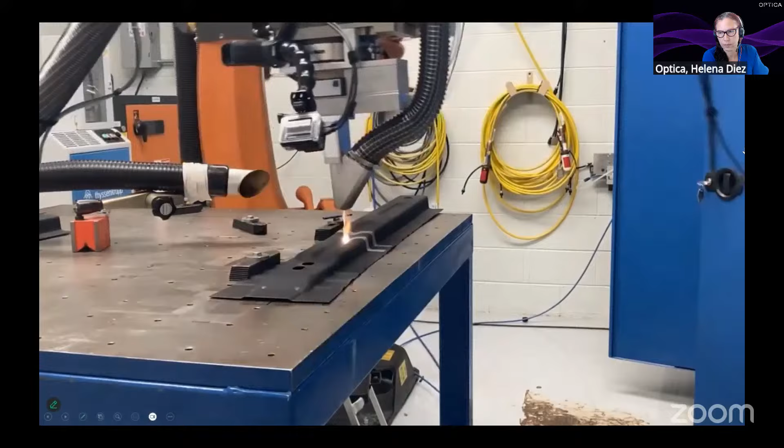Coming up, the Optica online industry meeting on laser cutting and drilling technologies. This 90-minute meeting takes place on Tuesday, November 4th at 10 a.m. Eastern, 3 p.m. in the UK and Ireland, and 4 p.m. Central European Winter Time.

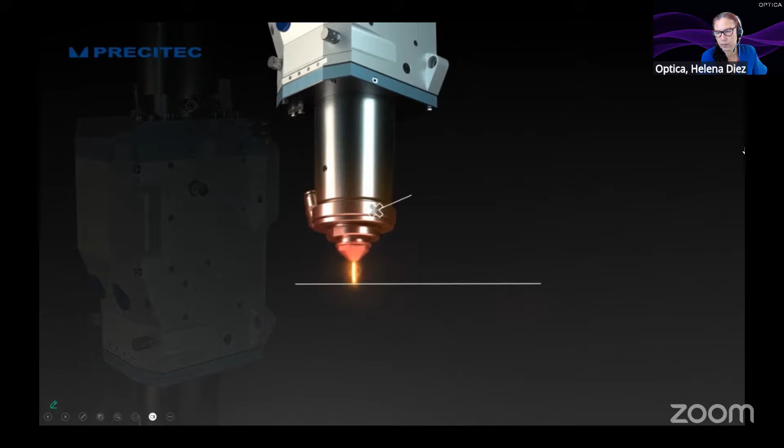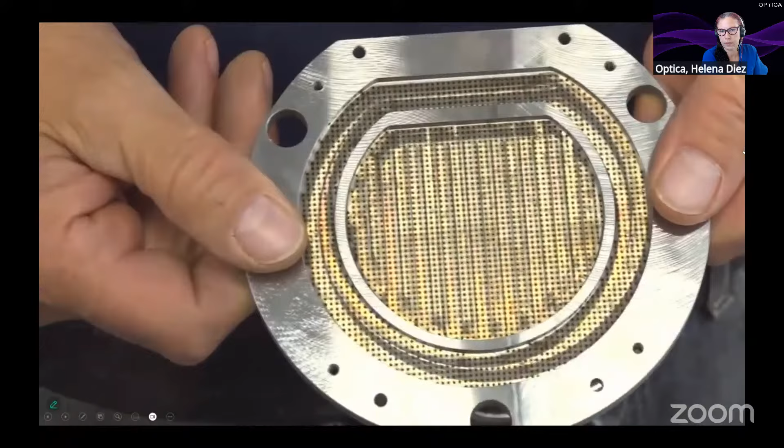This session explores the latest advancements in laser cutting and drilling technologies, two areas transforming industrial manufacturing in aerospace, automotive, electronics and medical devices. Laser cutting uses a focused beam to melt or vaporize material along a precise path, while laser drilling creates micro-scale openings in metals, composites and polymers. Together, they drive efficiency, precision and sustainability across production lines worldwide.

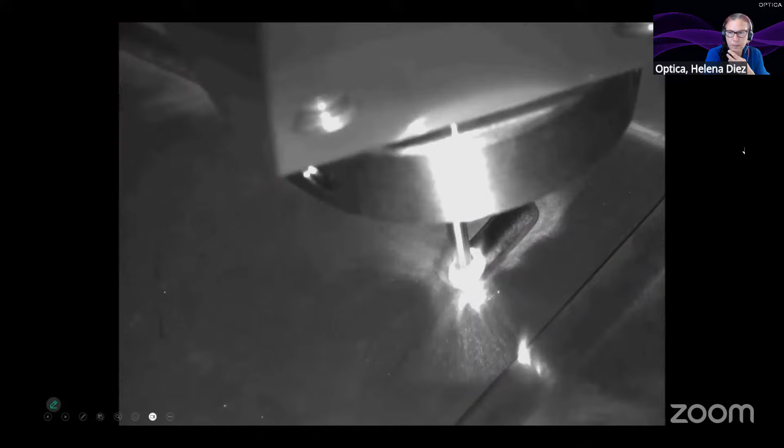We'll have featured speakers from Corning, Precitec and Trumpf. We expect to hear about metal additive manufacturing, making it possible to produce intricate geometries that traditional methods can't achieve. And representing technology enablers, we welcome active Optica corporate members, Raven, Aconier.

So, Aconier is doing laser machines?

And who can forget the demos in Munich from Fluence Technology. You can knock it, bang it, but the pulses, they are constant, they are stable.

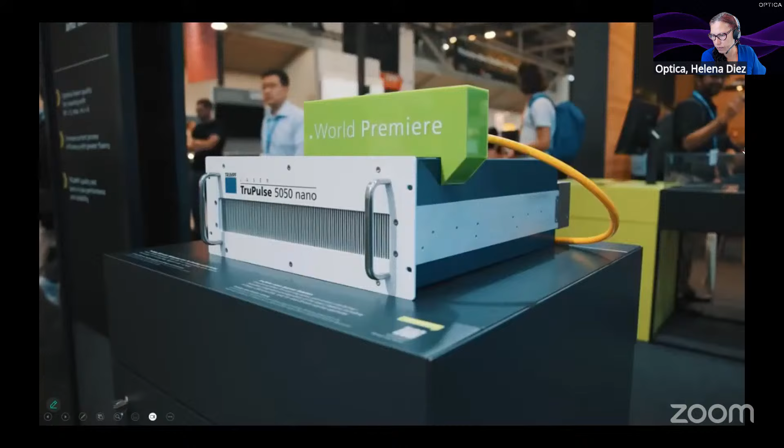Let's begin the live discussion. Hello everyone, welcome. The time has finally arrived. We worked very hard to make sure we had the who's who on laser cutting and drilling in the room. Welcome to the Optica online industry meeting on laser cutting and drilling.

And I see very famous friendly faces here. Thank you very much, Christoph from Iradion. Thank you, Celia from Raven. Thank you very much, Ilya from Fluence. Let's have a fantastic 90 minutes.

Allow me to remind everyone what we want to do here. In the next 90 minutes, with the support of ANSYS, we have two teams of companies. On one hand, we have integrators. As you saw in the opening video, Corning, Precitec, and Trumpf are here in the room to share with us their shopping list and what we can do for them.

On the other hand, we have the 2.1 micrometer lasers from Raven, we have the tools and the systems of Aconier, we have the ultra-fast femtosecond laser from Fluence, we have the company Iradion also offering their technology, the laser technology. The idea here is to make a match, not with those companies only, but also with everyone in the room.

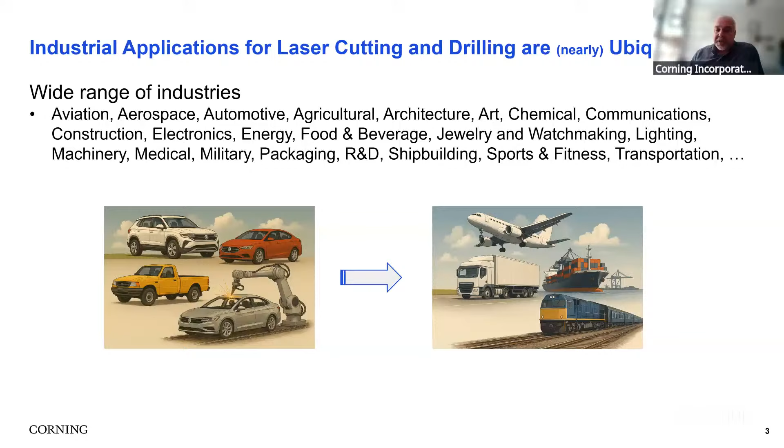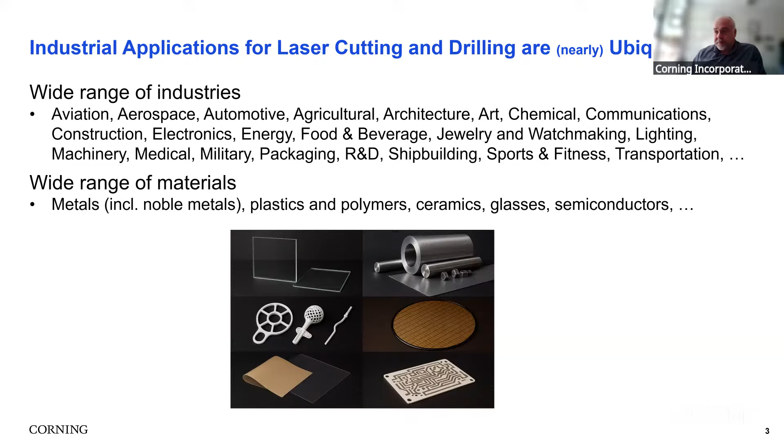Lasers are used to drill and cut virtually any kind of solid material. They're used in cases where you need very high precision, or where you need very low loss of materials, or very difficult materials to cut. So they have very powerful advantages: high material utilization, very high precision like I said. They also have very large process windows, so they're very stable, and they're very scalable for filling out, say, a large warehouse full of equipment. I'm sorry this picture's a little bit dystopian with the laser robots, but really, if you've got a large warehouse full of automation, you want lasers to be involved.

There are very strong trends in the industry favoring the large adoption of lasers, including miniaturization, which is pushing very high precision, automation, which is pushing scalability, low cost, and things like the integration of Industry 4.0. We're developing the next generation of materials, composite materials. We're using a lot of glass, very Corning here, so we've got thin, brittle materials, things with coatings.

And we also have rapid progress in laser technologies themselves. So you've got the sort of dollar-per-watt trend decreasing - things are much more affordable now. You've got size and form factor of lasers reducing, and you've got new wavelengths, things like burst modes, enabling lots of other additional laser technologies. If you want a little peek into this, there's a plug here for a December 2022 Optica blog post: how lasers are transforming the economics of industrial production.

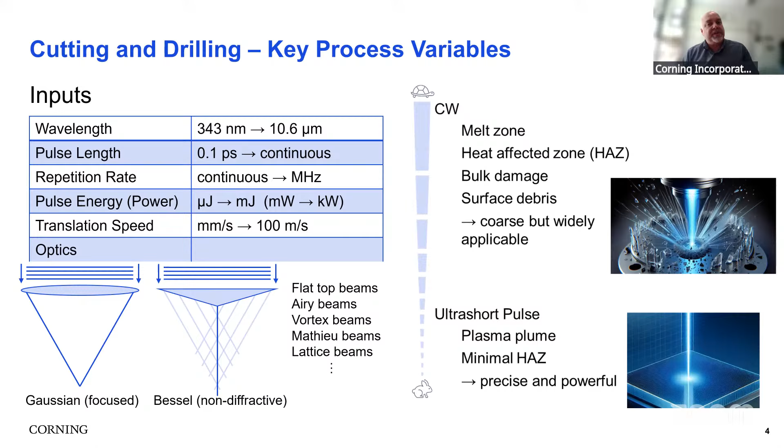Or you can go the other range and with ultra short pulses, start ripping electrons off of materials and creating very precise plasma plumes. This is a minimal heat affected zone, can be very precise and very powerful.

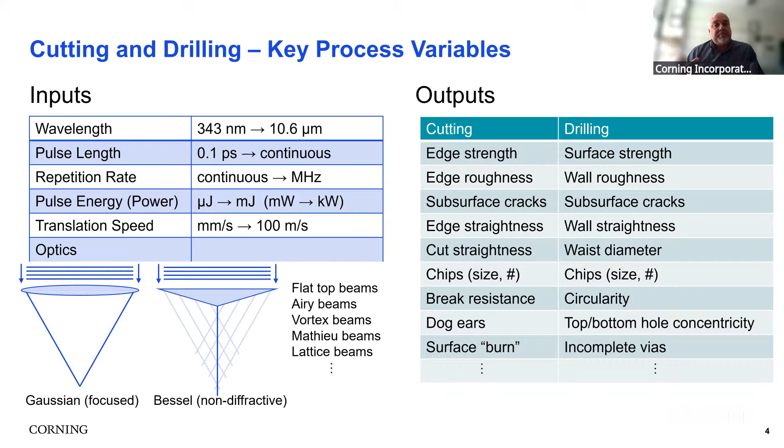In terms of outputs, you've got lots of quality metrics here about strength, edge strength if you're cutting, straightness, number of chips if you're using a brittle material, break resistance if you're separating materials. On the drilling side, you've got surface strength, you've got wall roughness. If you're making holes, you're looking at maybe circularity or the concentricity of a top hole and a bottom hole. If you're making vias, maybe you've got incomplete vias. So it's a very wide range of quality metrics.

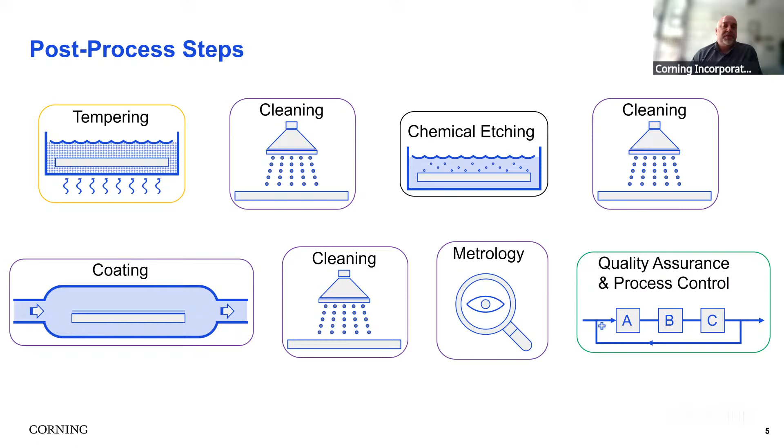Don't forget, you've got post-process steps. You need to potentially temper the material once it's been cut. You've got chemical etching or coating, certainly several cleaning steps as you remove either debris or accumulated environmental contamination. There's a metrology step very often that feeds into the quality control. And then you've got QA and process control where you feed everything back and improve your process. And this is in addition to packing and shipping and all the other processes as well.

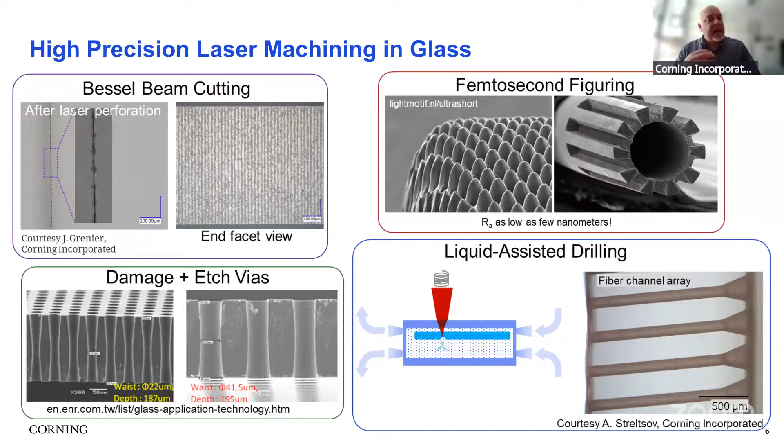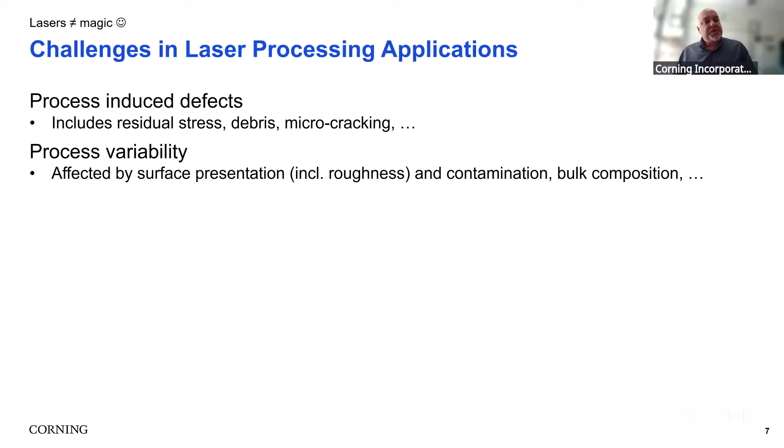All right, still, lasers are not magic. So there are still some challenges in laser processing applications. One is process-induced defects. This can include things like residual stress or debris. You've got some process variability. So lasers can be sensitive to roughness or waviness on the surface, contamination, potentially bulk composition, uniformity. The challenge certainly is to scale laser-based processes to dense arrays, trying to make very small textures across very large glass, for instance. That can be a challenge in terms of time and cost.

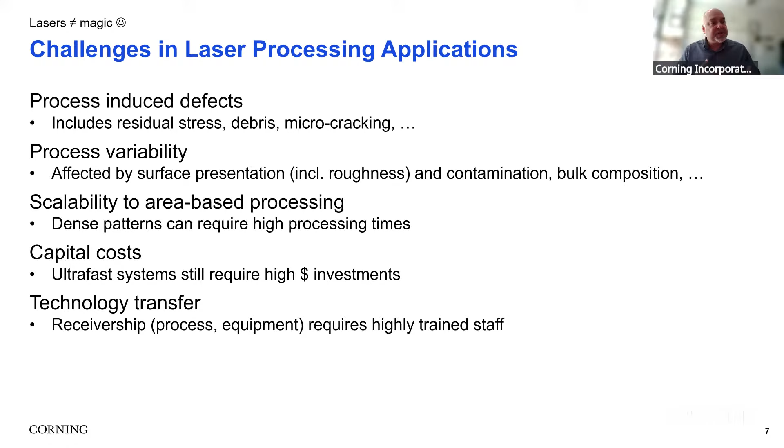Overall cost for the system can be a challenge if you're using things like ultra-fast systems, or you need a lot of them to cover a large area. So capital cost can be a challenge. And then personally, as we look to transfer new processes into manufacturing, there can be a challenge on this technology transfer piece. So that's receivership, either the process receivers or equipment receivers. This requires highly trained staff. So that has been an obstacle, can be an obstacle.

But overall, a very strong market pull, very strong trends, and advantaged technology using lasers. So I think there's a very bright future for laser processing, and I'm excited about the rest of the panel here and the kind of technologies that they're presenting.

Thank you so much. If you can put back your previous slide with challenges, yeah, this is one of the things. What are the major challenges for Corning and how can the industry help you? What could come from the industry, from the enablers, to help Corning succeed on these challenges?

Yeah, so certainly, I'm sorry. Was that a question to me? Yeah, that's a question to you. That's a question to Philip.

Yes. Well, certainly, because we have a lot of brittle materials, ultra short pulse lasers are a key component of how we do laser processing. So the cost, form factor, and reliability of that technology is a big part of it. If I had to pick one thing that could be influenced by the industry, it would be to keep advancing this ultra short pulse technology.

This is short picosecond or even femtosecond. If this could go from the lab into robust manufacturing, that would certainly be a plus. Lots of things we do here are done as a demonstration or as a concept, and we look to scale and it's just too expensive. Yeah, actually, yes. So I agree with Jose.

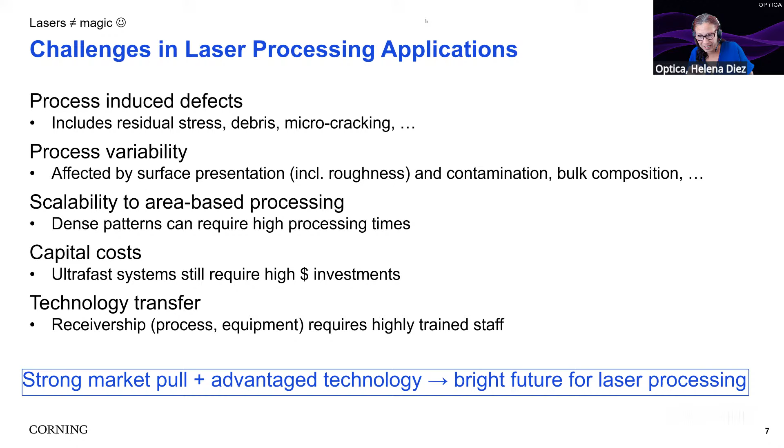Yeah, so I want to make sure you see my screen. You see my screen, right? Yes. Thank you very much for giving me the floor.

I would say it's a correct address if we want to discuss. Corning is glass, glass is Corning, and Fluence is building tools for cutting and drilling transparent materials, including glass. And Philip from Corning mentioned that drilling is now a more interesting and novel topic in glass processing. I don't have much time. I will try to cover the most important and interesting aspects of glass drilling and cutting using a femtosecond laser, like 250 femtoseconds, which we build at Fluence Technology.

So on this slide, we show the drilling capabilities for different types of glass. I'm not showing all types of glass that you can process. It can be Eagle XG, BK7. It can be fused silica. It can be silicon carbide. One of the advantages of our approach is to be able to process different types of glass with high speed, no taper, and with excellent aspect ratio. And of course, eliminating the need for chemical etching as a post-processing step. But at the same time, it doesn't mean that you can't use the etching post-processing step. So this method can also serve as the pre-step to etching if required.

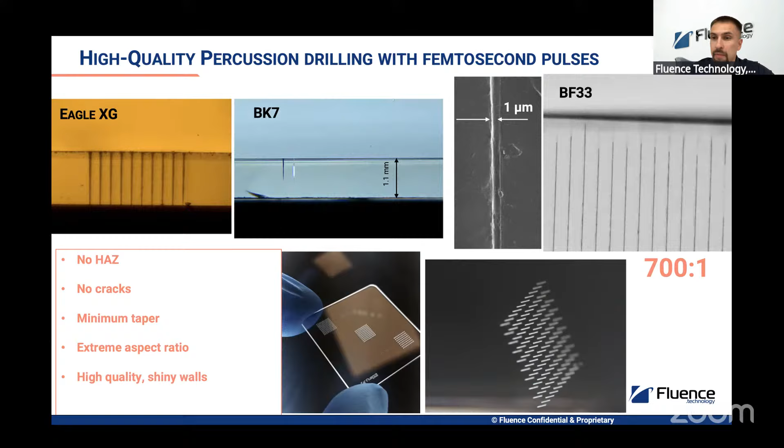I will move on to a more established process, as Philip mentioned. So glass processing, glass cutting. On this slide, we show the Bessel beam cutting method using the femtosecond laser. In general, glass cleaving requires the generation of microcracks within the material. However, the standard approach is not suitable for fragile ultra-thin glass, for example with thickness from 30 microns to 100 microns. So our regime of ultra-thin glass cleaving uses ultra-short pulses, like 250, 270 femtoseconds, which does not induce microcracks, resulting in excellent edge quality.

This is very important to reach good surface roughness. For example, the typical surface roughness we reach with our ultra-thin glass processing is, I'm sorry, 0.1 micron, and the typical one is 0.5 microns.

Also on the bottom of the slide, I'm showing that femtosecond lasers with compressor-stretcher configuration can tune the pulse duration from 250 femtoseconds up to 20 picoseconds. This configuration allows efficient cutting of not only ultra-thin glass, like I'm showing at the top, but also relatively thick glass, up to 3 millimeters. On the slide, we show soda lime 2 millimeters, but even with 200 microjoules and 30 watts of power, you can cut up to 3 millimeters glass in a single pass using our approach, and also up to 8 millimeters with multiple passes if necessary.

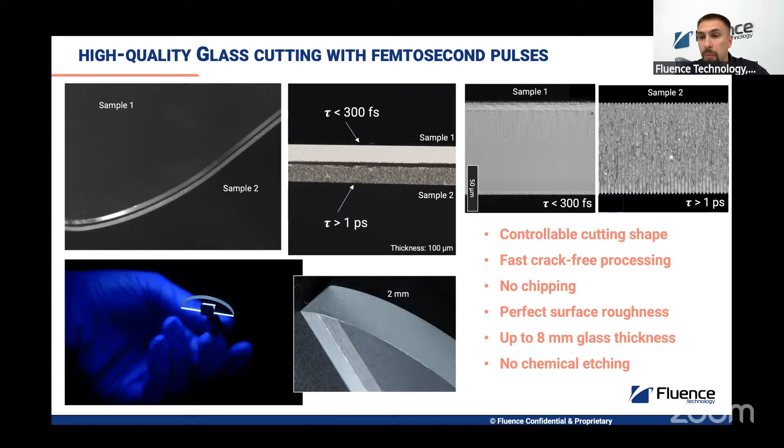Everything I showed was done and can be done with the Jasper X1 laser that we have at our application lab, where we are gaining experience in micromachining and helping our customers to have the best laser tool for, for example, glass processing. And it's not only glass processing.

So our Jasper X1 is an all-fiber laser. The main idea and feature is to have an environmentally stable laser system, which can be mounted in any orientation, has quite high vibration tolerance, and no free space oscillator, which is a very important part of the laser system, decreasing the cost of ownership of the laser and the whole micromachining system where this laser can be installed.

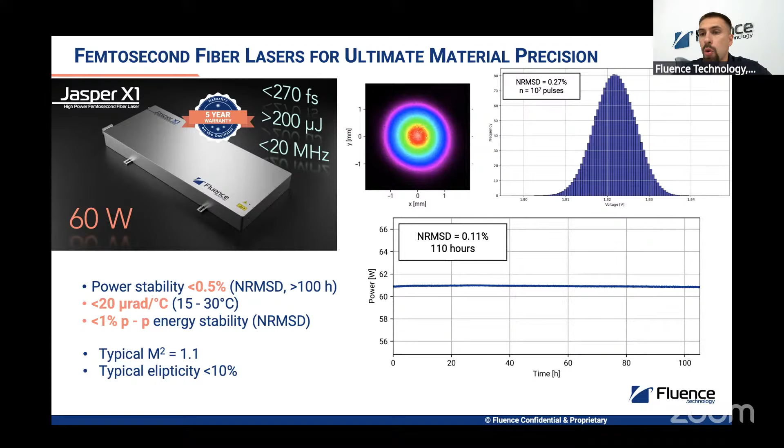We want to learn a lot more, because what you're doing, Ilya, is fascinating. But allow me to go back to Philip. Philip, it is great to have Corning with us. We want to understand a bit better the main challenges for increasing throughput. We have many people here in the room that can help you with these challenges. Could you summarize now what is the main challenge that you see in making laser cutting and drilling faster?

Right, so cutting typically is pretty fast if you're making sort of one-dimensional cuts, right? So you're cutting out borders of things, and you're limited then by the acceleration and deceleration properties of either the optics, if your optics are translating, or the material as you're translating this material. There are ways of parallelizing cutting. If you're making smaller parts, you can split a beam or have multiple beams that are creating parts in parallel.

So typically the cutting piece is okay from a cost per throughput standpoint. It's all pretty okay. Drilling can be a challenge. So if we look at, say, co-packaged optics, or things like glass interposers, where you have large panels, 0.5 meter by 0.5 meter, and you have to deposit 1 million or so holes into these panels for electronic applications, now you've got a problem of locating the beam. Repetition rates are usually going to help you with that.

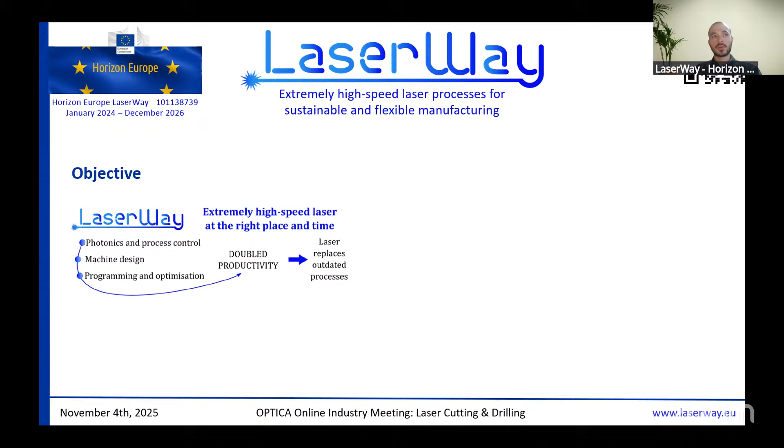Good afternoon, everyone. My name is Arturo Elias Jumbet, and I am the Dissemination, Communication, Exploitation Manager for the project Laserway. Laserway is a Horizon Europe project whose main objective is to develop extremely high-speed laser processes for sustainable and flexible manufacturing. Laserway is innovating in 3 fields: photonics and process control, machine design, and programming and optimization. There are 3 technologies with 4 use cases, but I will only focus on laser blanking and microdrilling, and briefly introduce the partners involved in each solution.

For the Laserway blanking solution, we have Fagor Arrasate in the Basque Country. They are the machine tool builder. Fagor Automation is working on the programming and the process control. We are using innovations from Precitec on the laser head to allow cutting accurately and at extremely high speed. Compotech is providing lightweight composite structures to facilitate the fast movements of the gantry in this machine.

Video Systems from Italy is providing solutions for in-process quality control, while ModuleWorks in Germany is working on algorithms to optimize the process and make it more sustainable in terms of scrap production using nesting algorithms. RCMT and IDEKO are R&D centers. IDEKO is the coordinator of the project. They are working together with the rest of the partners in designing the machine and optimizing the process. The main use case for this big machine within the project is the production of B-pillars for the automotive industry.

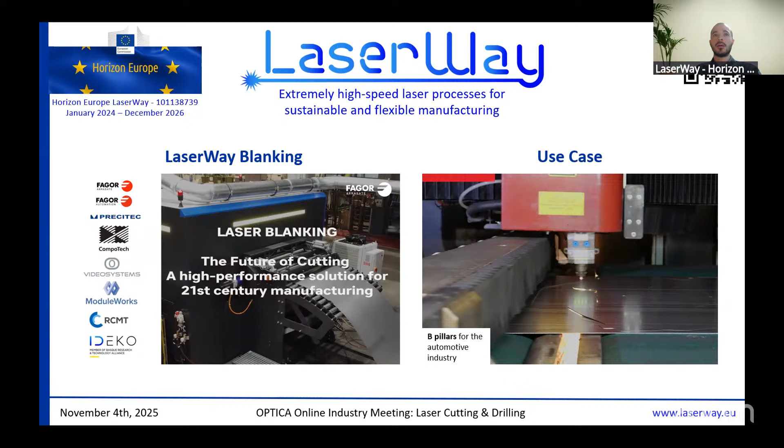But the idea is to really provide a solution to this industry in which small to medium-sized batches can make use of the flexibility of laser cutting, which is of course in opposition to the wasteful and more conservative, let's say, press blanking that is used in this industry.

In the Laserway microdrilling solution, we have Tekniker, also in the Basque Country, leading the developments. They are working together with Cedrat Technologies on innovating in the laser head for an accurate and faster drilling process. Video Systems is also providing quality control solutions here, and Azud and Aernnova are end users, and they are of course providing feedback to the developers on the two use cases for this solution.

The first one is coming from Azud. They are specialized in providing water filter solutions for agriculture. And the idea is with this huge machine, a very big machine, to produce filter cores for these water filter systems. And the second use case is provided by Aernnova. It is a technology previously validated in another EU funded project.

And the idea is to manufacture big micro-perforated leading edges for aircraft wings to implement the hybrid laminar flow control technology. This technology allows these micro-perforated panels to decrease the drag forces on the plane, and it has the potential to reduce fuel consumption up to 9%. Well, that's briefly what we are doing in LaserWay related to laser blanking and micro drilling.

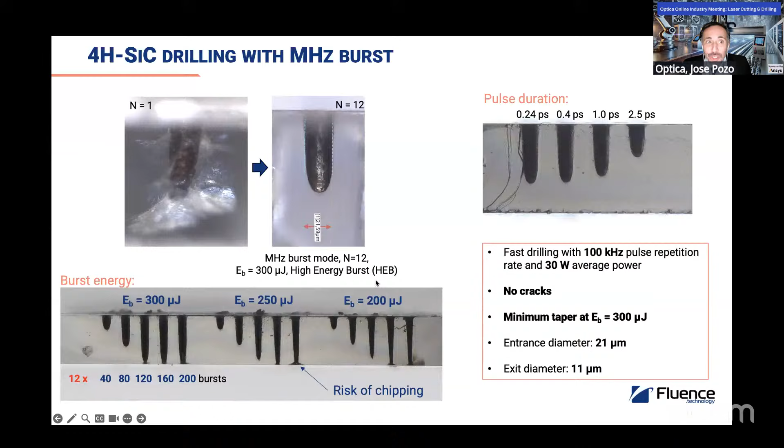That sounds like a challenge for a very good laser head. So I think later on you'll see a presentation from Marcus from Precitec. But before that, there's exactly 45 minutes to answer the challenge. Just to remind everyone, we need a 6.35 millimeter, quarter inch deep hole with a 0.05 millimeter radius, and it has to be exactly straight. We need to find that on silicon carbide. Ilya is smiling from Fluence, Marco is smiling from Precitec, there's a lot of people very happy right now. Also Trumpf is smiling. I leave the floor to Helena to continue moderating the event.

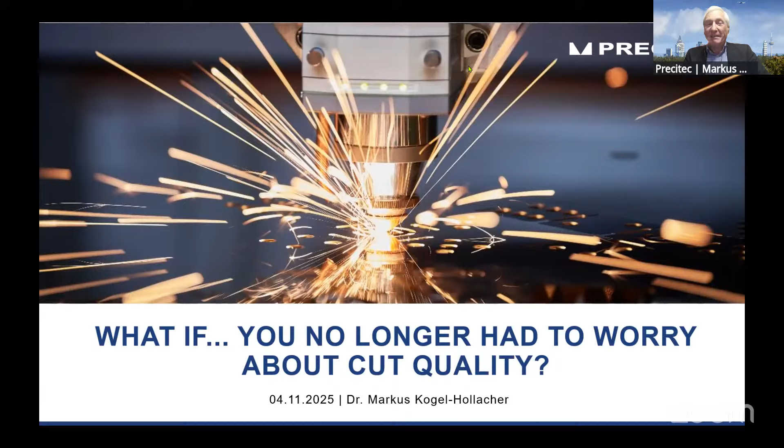What if you don't need to take care of your cut quality anymore? What if the machine is doing everything for you? Let's see. Precitec, as you know it, I'll just go over that slide quickly.

We are still a company worldwide, with subsidiaries and representatives, and we are still 750 people in the world, looking for all the possibilities of applying laser radiation, laser photons in industry.

Laser systems, no longer one fits all. This is a presentation actually shown by my boss at the AKL conference last year. You see that the numbers, the kilowatts at the cutting heads, are increasing and increasing. I myself have been with Precitec for 30 years, more or less.

Not 12, I would say 12, 13 years ago, there were discussions on the thermal focus shift in processing optics already at 4, 5, 6 kilowatts laser power. And now we're talking about 200 kilowatts.

And we are still talking about transmissive optics. We are happy that all glass manufacturers have innovated a lot in recent years in order to build pure glasses which we can use in our optics, with very, very low absorption in the bulk material.

And the same with the people who do the coating on the optics - very, very low absorption in the coating layers. So these innovations, these companies, make us capable of working on those new cutting heads.

And yes, we are trying to replace plasma cutting. Just one side story: when Precitec was founded in 1971, there was already a patent existing, which was claimed by the wife of the founder of Precitec.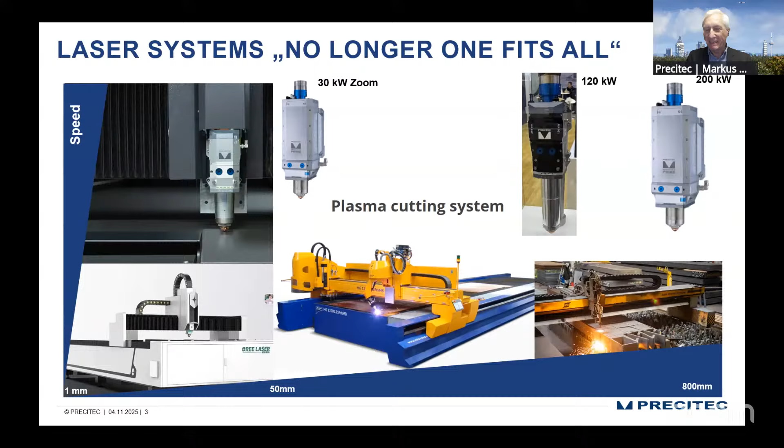She claimed a patent for capacitive distance control for cutting tools, and that was for plasma cutting tools - a plasma protected capacitive distance control. You will see later in my presentation that this is still one of the important things.

So yes, we are applying photons into processing heads for cutting. You see the family of laser cutting heads is increasing all over the years, from small to large, from 2D to 3D, fine cutting. You will see a little bit of all of this during my presentation.

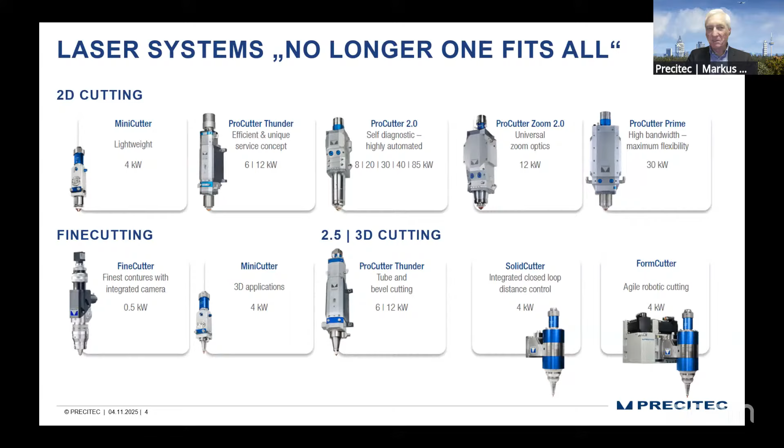This is important: if you still want to be a global player in cutting, you need to have that family of cutting heads. But if customers see that slide, they just think, what does it mean for me? Let us take care - let Precitec take care, and let us take you by the hand and show you what is best for you. So we start with

ProCutter Prime today. This is our latest innovation, a cutting edge product which has a lot of features inside, and you will see those features during my presentation. It's important to have those features these days.

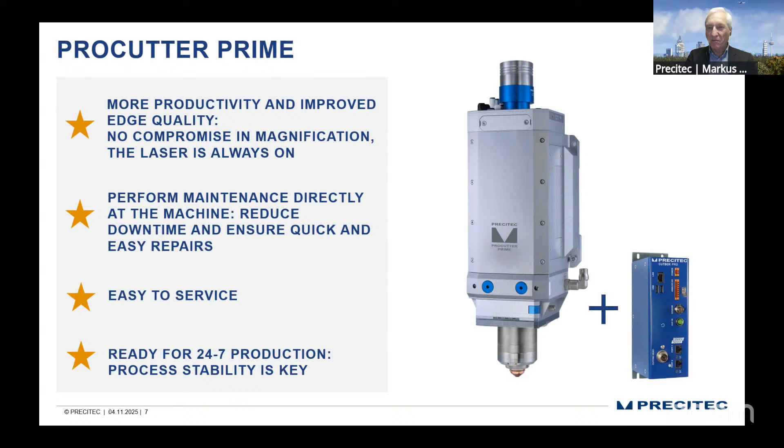So it's not just only photons in, photons out with some capacitive distance control. We have a lot inside the cutting head. Important is also how we build the cutting head. I'm always a little bit careful...

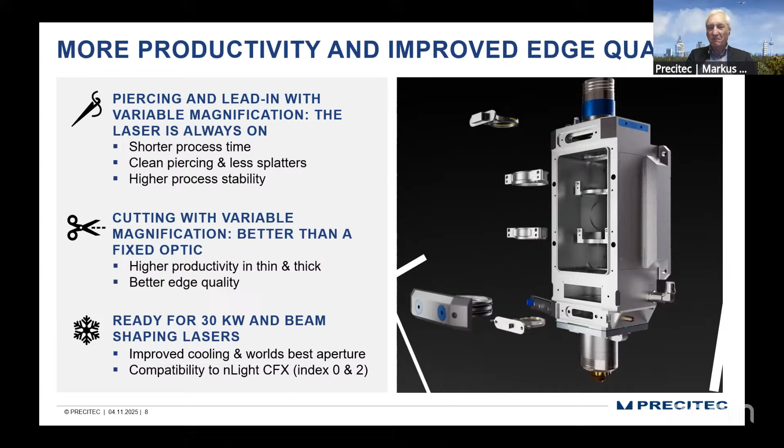...if I talk about the cutting head being easily serviceable, because typically we say we don't need any service. But if there is service, you see that there are a lot of cover glasses now inside our cutting heads, in order to protect the optics, because any kind of small dust on the optics will directly kill it and will not make the process work anymore.

But yes, as I said, there's a lot inside the cutting heads, which is also based on AI. We have a lot of software in the Cutbox Pro, which is the system connected to every cutting head. One important thing, for example, is that we vary the magnification during the piercing process.

You see here from step number 1 to step number 6, how a piercing process in a thick section steel - this is a 40mm steel sheet - works, where we start from a magnification of 1.2 to a magnification of 4.

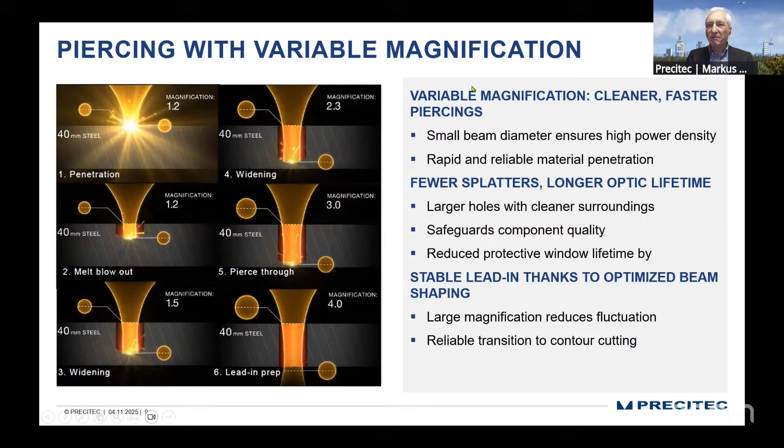You see that we gradually increase the magnification, which is important to have a very fast and very robust piercing process, because you lose a lot of time if the piercing process is not as fast as possible. So large magnification reduces the fluctuations, and it's reliable. The same, and this is even also important, applies when we start the cutting.

We see on the process emissions and on the response of the sensors we have some of the process radiation, and on process radiation we can also react.

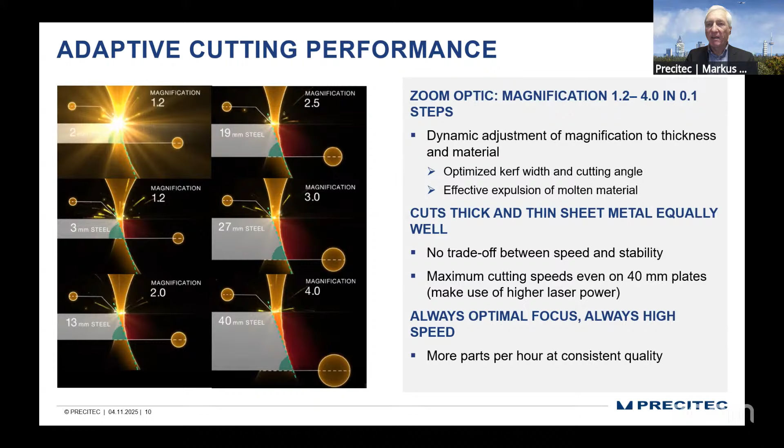And for sure we need to work on different magnifications also when the sheet thicknesses increase. So this is one important factor of those moving optics in our cutting heads, that we can easily increase the spot size, the magnification, and react on different sheet thicknesses. And you as a customer in your machine can just put in any kind of sheet thickness, and the processing head will align to it and make it work fine with optimized kerf. Everything is effective and everything is fast.

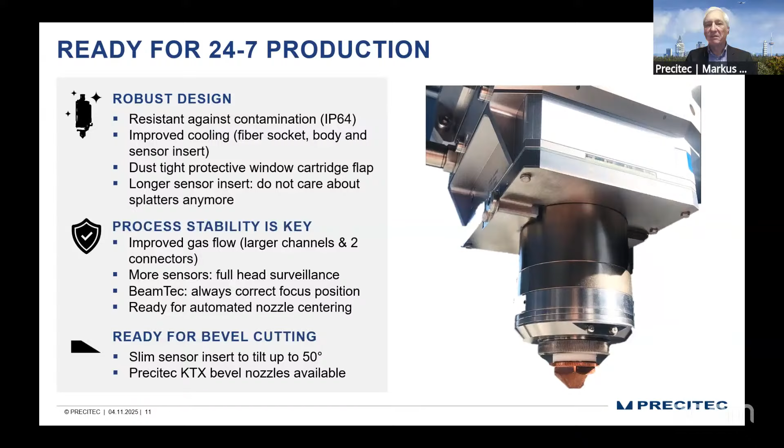Here you see one of the processes where we already apply artificial intelligence. What we see is on the sensors inside the processing head, that some of the optics are heating up, which means we have a thermal focus shift. If we don't do anything, we will lose the focus - it will shift from the middle of the sheet to the top layer of the sheet and the cutting, you will lose cutting. So it's important when we know the temperature of the optics that we react accordingly.

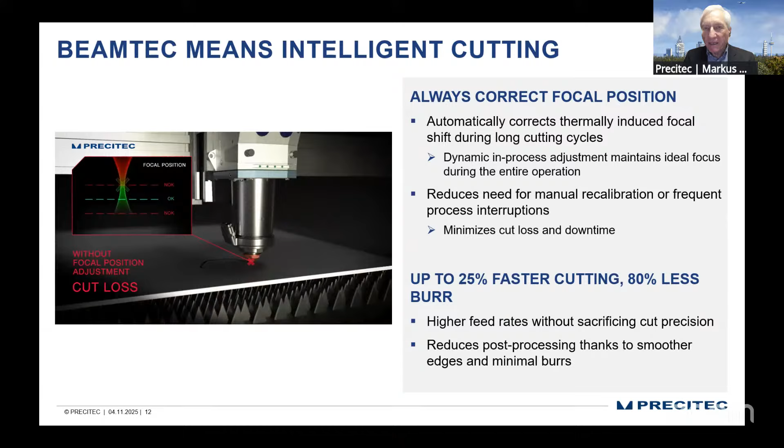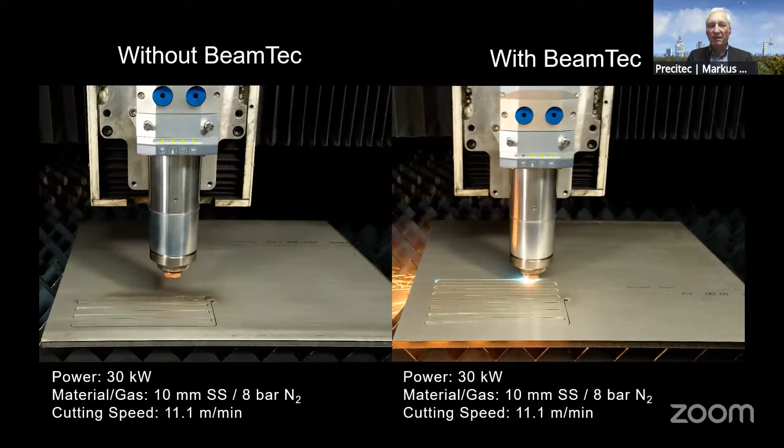Reacting accordingly means we also use the same optics which we use for magnification in order to shift the focus to the right position. And here you see how it's working on the left without BeamTec, which is our software tool in our CutBox Pro, measuring all the temperatures of the processing heads and changing the focus position accordingly as we see there is focus shift. We know that based on the laser power and time, we know the temperature. So there are a lot of sensors working for BeamTec in order to keep the focus point at the right position, to never lose the cut position, never lose the focus position. By doing that, we have 80% less burr because we are also keeping the cut quality in the desired region. So this is BeamTec.

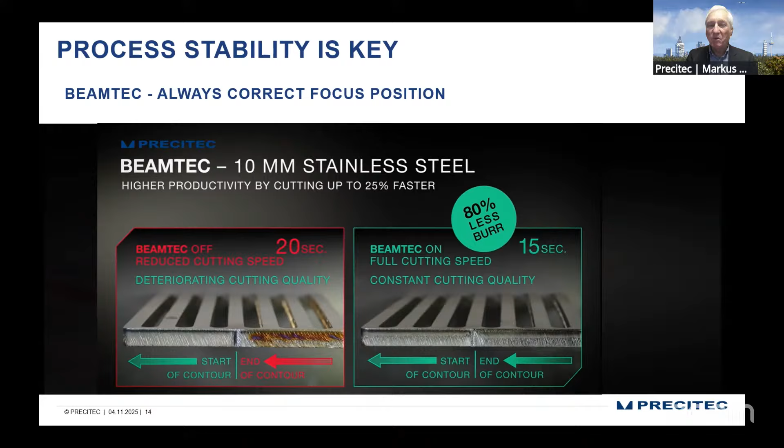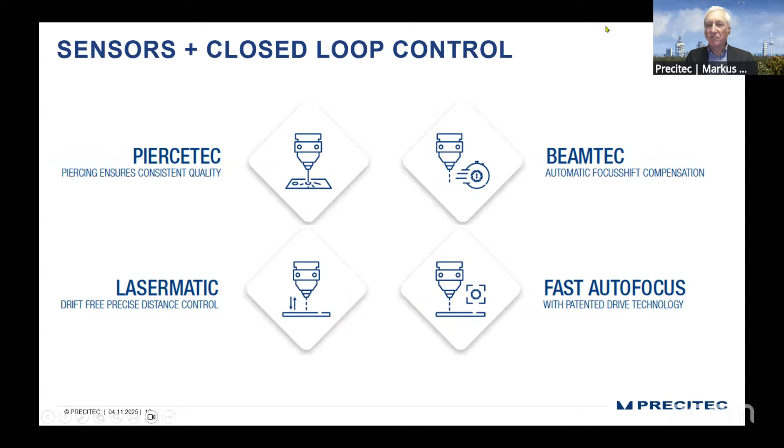BeamTec is actually, I would say, the first Precitec product where we applied AI modules on laser processing. So you see there's a lot of sensors in a Precitec cutting head, especially in the ProCutter Prime. We have PierceTec, the intelligent piercing process, the Lasermatic, the capacitive distance control. We have BeamTec, which keeps the focus at the right position. We have the fast autofocus. We have temperature sensors - we need temperature sensors in order to measure and monitor all the heat in the cutting head.

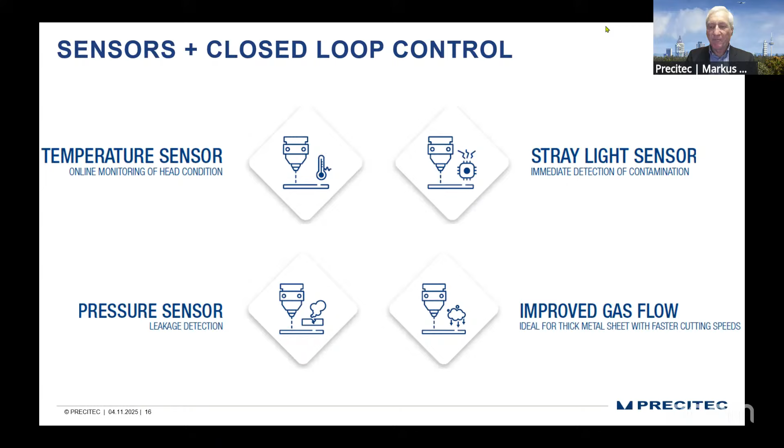Stray light sensors are important also to see if there is starting of a little bit of contamination. This you will see in stray light sensors, and then you can react accordingly. So we try to have a fully safe cutting process, and whenever there is something going out of process, we can stop and give alarm signals. So this is what you see here, just on a different scale - a lot of sensors and where they are mounted inside the cutting head.

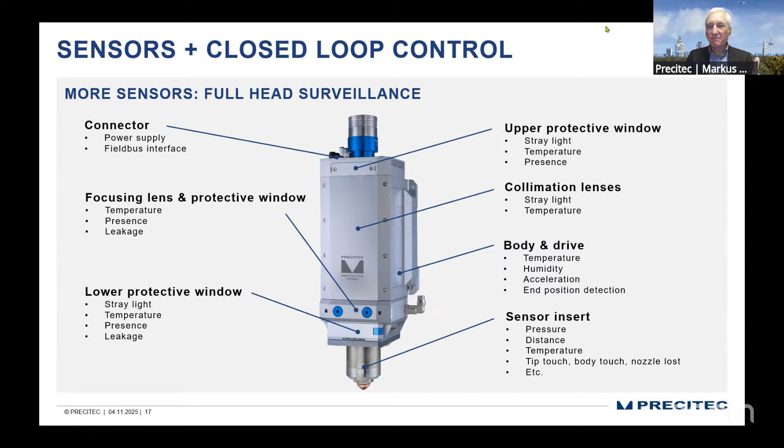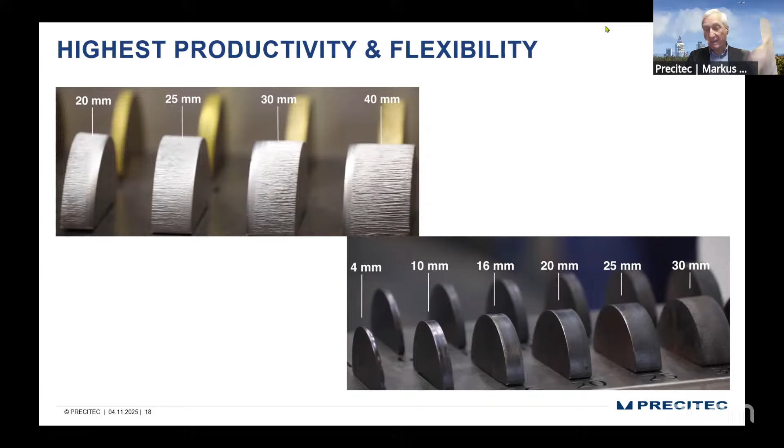And yes, with all the sensor technology, with all the closed loop controls, we can also always provide the best cut quality on different materials. Here's just a fraction of materials. And yes, material thicknesses are getting higher and higher as we want to compete against plasma cutting.

And as I said, Lasermatic is, let's say, the first patent which was applied in 1968 - you have to remember, this is a long, long time ago. And Kimla, one of our customers here, it's not only the Lasermatic, it's also the machine which has to work with the sensor, and they do it impressively accurate.

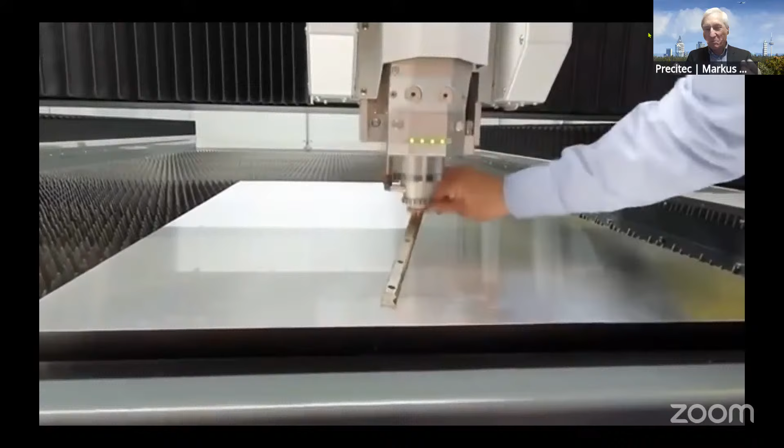So this is just a video which I found on LinkedIn, which is showing how well you can work when the processing head is working together with a machine builder. Then you don't have to fear that there is any collision during your process. There will be no collision during your process. For sure, this is without laser radiation. I heard some comments during the rehearsal, but I find that very, very impressive. And yes, thanks to Kimla for their excellent partnership over the years.

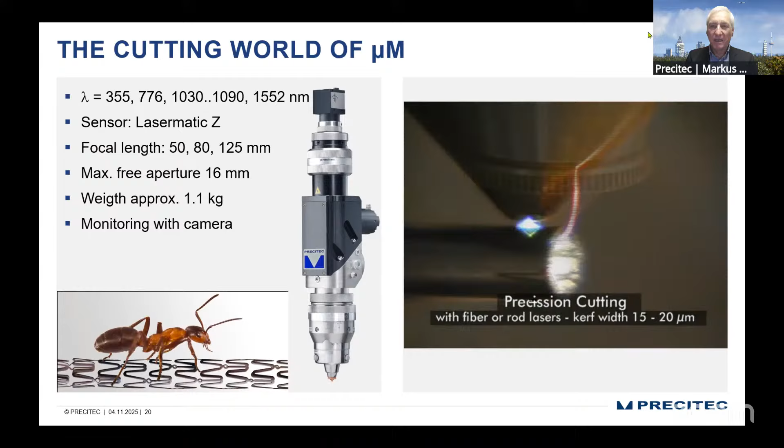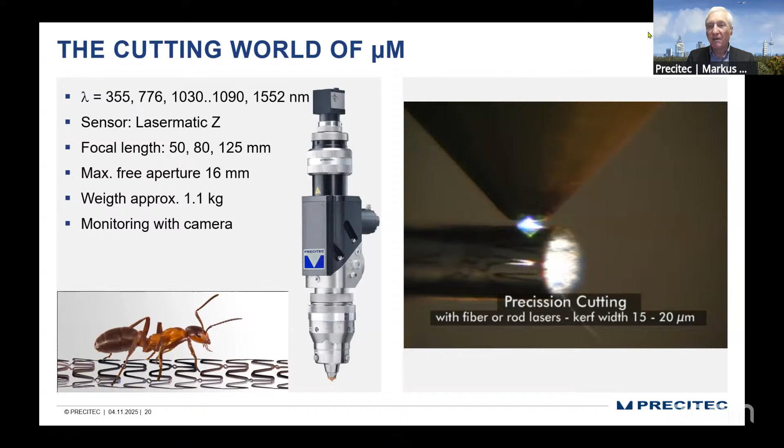Yes, and for sure, we are also working in the other region, in the micro region, with different wavelengths. So from the short 355 to the infrared, maybe also one time 2 micrometer, if there is a market for 2 micrometer. This is what we call fine cutter. Typically, as you see, it's something like stent cutting, but there are a lot more cutting applications also in the consumer electronics industry right now with that technology, with that fine cutting head. And yes, as you see, we definitely also work with monitoring devices, online monitoring devices in laser cutting as well.

And this is my presentation and I'm open for questions. So if it's about choice, we think we have it all. I think there's nothing missing from the Precitec product range with respect to laser cutting in medium and ultra thick section materials. And if you have questions, we're guiding you. And we are still innovating, as you see. We are still innovating the cutting world. I think we will be the first ones who will have a 200 kilowatt cutting head on the market. But still, if you want to challenge us, try it. We are happy to work with you. Thank you so much.

Thank you very much. I'm very, very happy to see Precitec moving forward. This is really a big change from the previous years that we were talking, and it's really nice. So now we have Marcus Rutten from MKS. Marcus, could you please open your mic and ask your own question? Yeah, I hope you can hear me. Yeah, thank you so much for coming, Marcus. Marcus versus Marcus. And Marcus knows when Marcus asks, there might be a challenge or not. You are 30 years with Precitec, and I think we know each other for 29 of that.

Quickly, when you go to 200 kilowatts, I had been involved with 100 kilowatt optics already. What do you think is more important if you go to 200 kilowatts? Is it the coating of the lens, or is it the glass body of the lens? Of course, both must be in place, but what's more challenging at the moment? Let me ask like this.

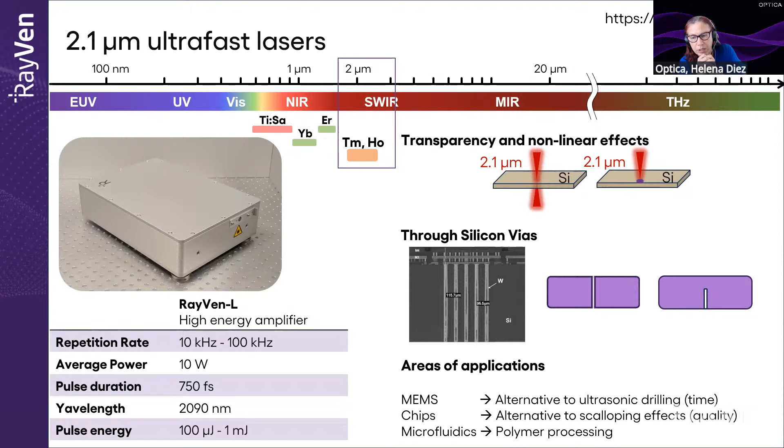Yeah, so there are a lot of people in the room that can be contacted to consider your laser. But now I would also like to give another perspective for laser cutting, and I would like to call Christoph Wunderling from Iradian Laser. This is a totally different approach. So Christoph, could you please open your camera and show us what Iradian can do for laser cutting and drilling?

You are mute. Cannot hear you. Thank you very much. Sorry. You can see my screen in presentation mode? Yes. Perfect. So thank you very much for having me here in this event.

Very interesting discussion. And I think there is some kind of a transition from the last presentation from Celia to now. What I want to show is our laser opportunities for semiconductor and microelectronics processing, because in my opinion, these industries are a paradise for lasers. So my name is Christoph Wunderling. I'm product manager for short pulsed and ultra short pulsed lasers at Iradian. And at Iradian Laser, we are a key supplier for these two industries.

And these two industries are very extreme for us because we need to be very innovative in these industries, because these are industries of the extreme. And what I meant with that, I want to show here on the left side by 4 key applications that we address with our pulsed lasers. We already heard of drilling holes in glass wafers. So Ilya presented it, and thanks to you that you already gave an insight to that. TGVs are increasingly coming for producing interposers. So what we see here is a glass wafer drilled with thousands of holes. And the challenge here is to be very, very fast, because thousands of holes need to be processed in seconds. This is the requirement of the industry here.

So I want to introduce TRUMPF shortly and myself and go into some application details. So TRUMPF is family owned. It's a technology leader, as you introduced it. Thank you much, Helena. We're customer focused, so we have over 70 subsidiaries all over the world, so close to the customers. And we're innovation driven, so there are many funded projects, scientific areas where we work on photonics. And also it's a sustainable company because our owning family is really valuing that high.

So to give a quick introduction for myself, I'm the product manager for ultra short pulse lasers. So all TRUMPF femtosecond lasers are under my portfolio.

So yeah, TRUMPF has a wide portfolio of different laser technologies and different machines, so also machine tools. And we're going from big dimensions, so we have seen already 40 millimeter thick sheet metal, but also to high precision. We are able to go into the femtosecond regime in microprocessing, thin copper films in this case for electronics, or also the semiconductor industry with femtosecond lasers. And then in combination also with the right optics, we deliver the laser sources to it.

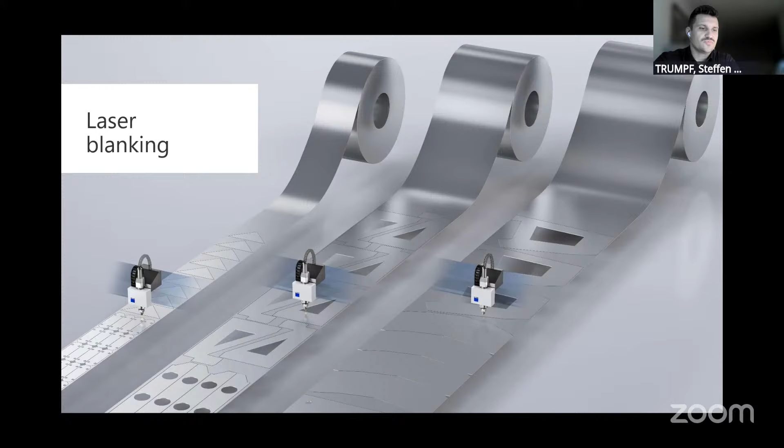We also heard already about laser blanking, so large dimensions, not micrometers, but meters. We have coil editions for our TruLaser 2D cutting laser system. So that is a machine tool business unit, but it also helps raising the productivity and reducing waste in large scale productions, for example, automotive.

Then we already have heard about silicon drilling, silicon processing for the semiconductor industry. So that is also where we are present with our laser sources. We are present with our application experience, and we can also support and go into details to adjust and find the right laser parameters.

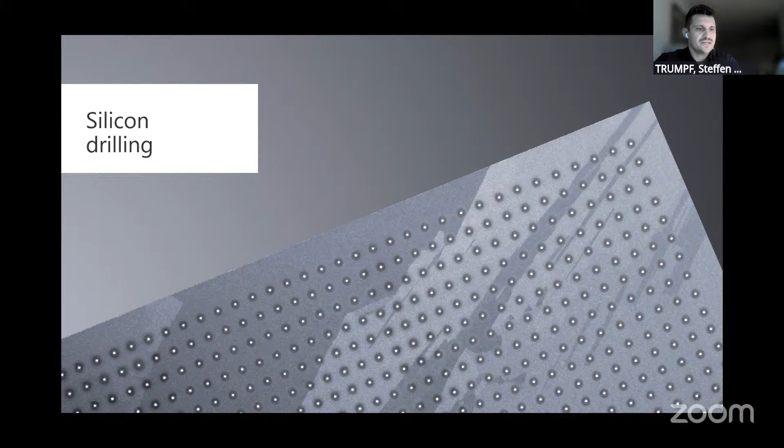And then the silicon drilling. We have heard that laser cutting or laser drilling is not like the mechanical drilling we know, but it's positioning of the energy in a really small focus. So there are also different optics, different scanner systems. Also beam shaping helps to improve laser drilling. And then this goes into membranes, filters, large area applications, into water filters, for example. So there are many industries and application ideas or possibilities where you can use the laser.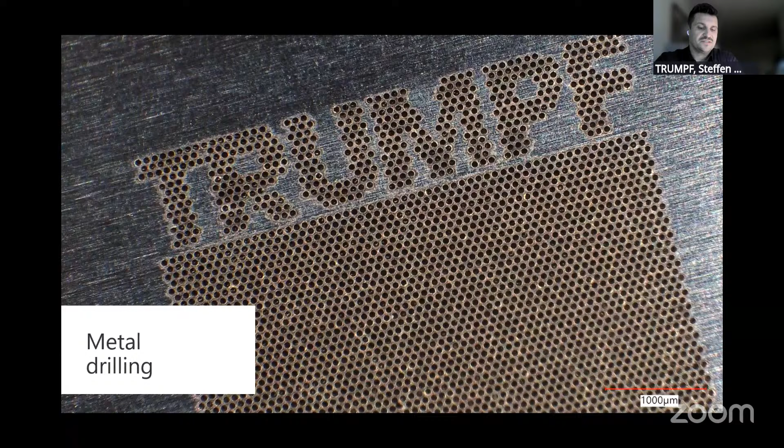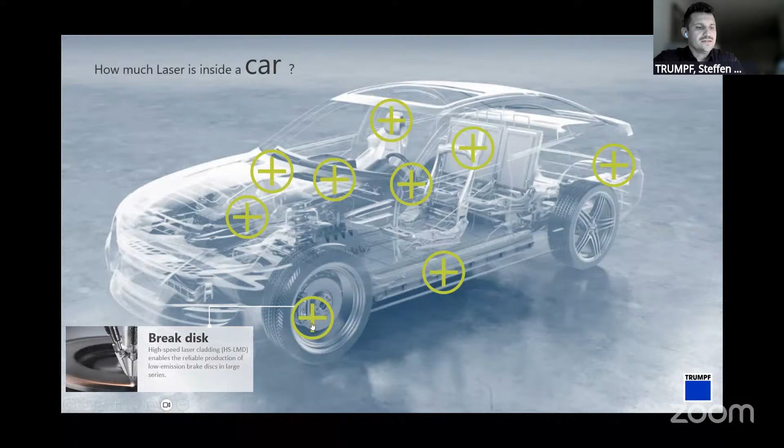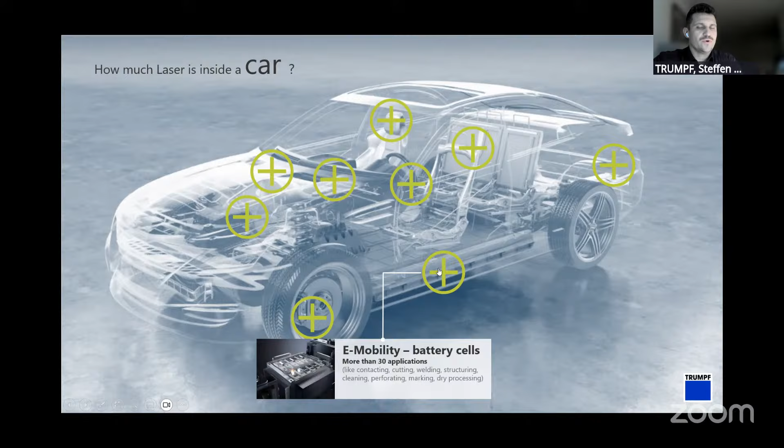Looking more into the industries, for example, inside a car, there are many laser applications. I just want to highlight two of them. So one is the brake disc, where we use the high-speed LMD. So that's not cutting or drilling, but still it's a laser process to coat for environmental improvements. But more laser processes in battery cell manufacturing, like cleaning, contacting, welding. So there are many applications where you could go into. And as you can see, there are many more around the cars.

But also in other industries like consumer electronics, the smartphone is really present in all our hands. So we also go from cover glass cutting or modification and etching. Actually, we have the laser sources and the optics to it to have really challenging processes to increase the damage threshold there, or the OLED cutting, like the film cutting with the UV femtosecond laser, for example.

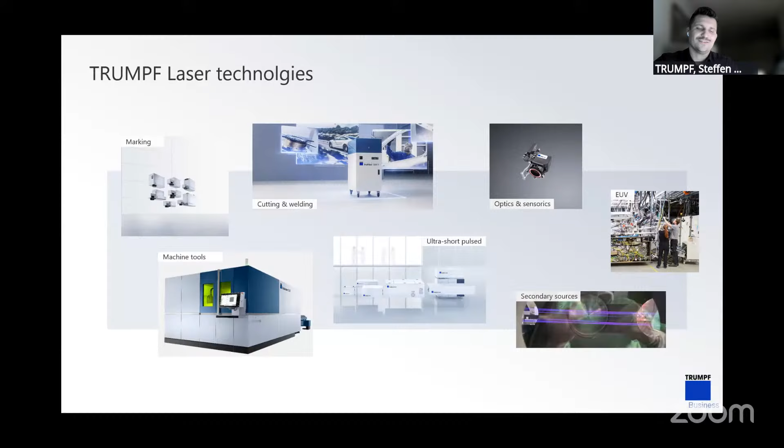And then if we look on the right side, with secondary sources and EUV, this is the future applications. EUV lithography is already state of the art, but secondary sources to go into photon acceleration, electron acceleration, or neutron acceleration for different scientific applications. So that is the innovation part where we're moving on, and to bring that knowledge then into industrial products. That's our approach. And now for OFEC, the challenge is accepted for different technologies.

Yeah, thank you for the nice presentation. I was curious what the role of galvos and scan heads is in your solution, because you're going to have to aim the photons in some manner. How do you do that?

Yes, well, we're the laser manufacturer, so we produce the source, but in our application labs, of course, we have different scanners, different galvos to bring the energy, the photons onto the workpiece. So we support in this case, and then our customers are free to choose which galvo scanner they use, or which other possibility, whether it's a solid state optic like our TopCleave optic we offer, or a polygon scanner for large area applications.

It's open, but as I said, in the process from laser modification to etching in the glass process, also here the whole solution plays a role. So the scanner needs to have the right interface to the laser, that they can communicate, and that we position the pulses in the right spot at the right time. But we're open.

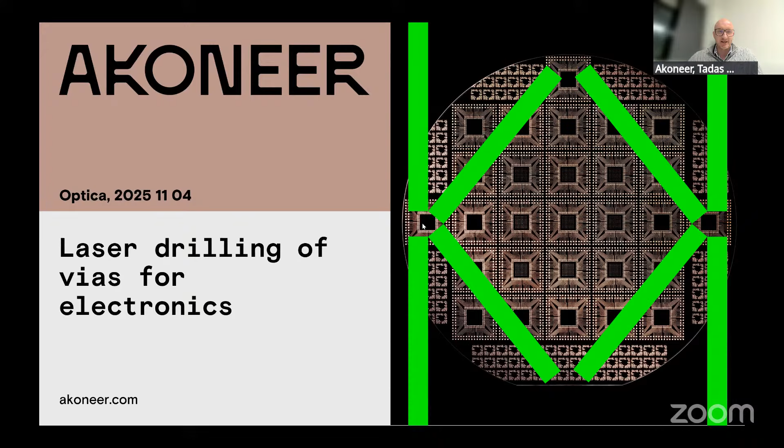Nobody needs your lasers. Unfortunately, nobody needs our laser machines either, because what we saw from OFEC as well, people need holes, cuts, etc., so we need to provide real solutions for that. And if we talk about electronics and chip packaging, well, nobody needs holes either. So when we are talking about TGVs, etc., it's only part of the solution. What people really need is a final interconnect, a metal conductive connection between multiple layers.

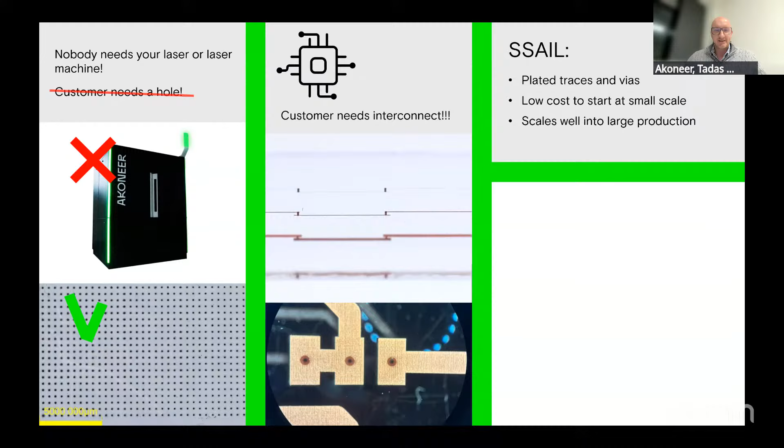That's the situation where one of our technologies comes in, where we do both things at kind of the same time with the help of laser. We are drilling the vias, be it glass or some other material, and we also have a special laser plus chemical process where we can plate copper traces and copper into the vias. So just a reminder from us to always look at the whole process and take everything into account, because when you focus on the very small area, those local efficiencies don't really matter that much.

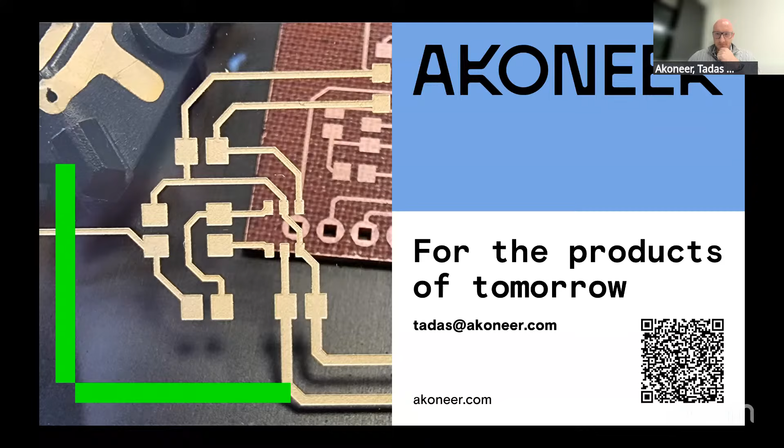I don't know if we would take the silicon carbide drilling challenge ourselves, but I have some ideas to suggest where to check it out, so probably I'll make a list of that. Also, 2-micron lasers and silicon is an interesting thing. Maybe we can achieve in silicon a very similar thing that we are achieving in glass—not only forming the via, but also enabling plating directly after the via to have that interconnect instead of just a via. So I'm quite confident something like that could be achieved with 2 microns as well.